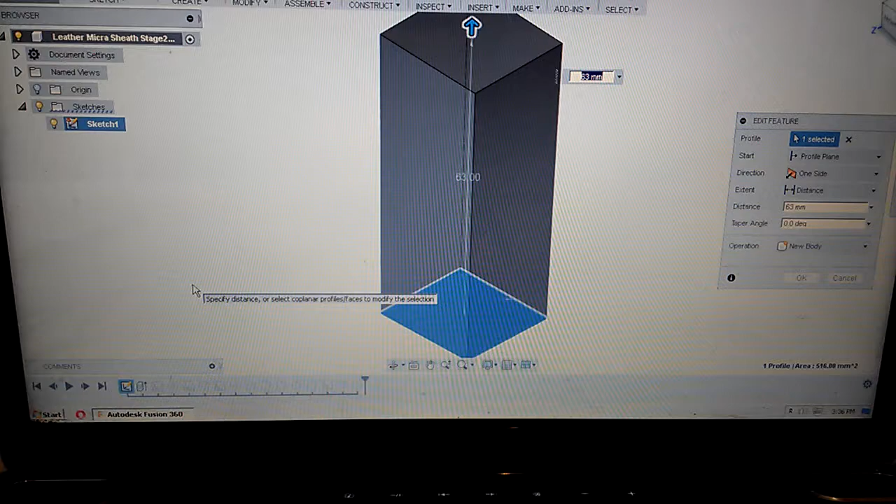This is a Leatherman Micra, and this is a Leatherman Micra case, which is not quite exactly how I wanted it. Well, it's exactly how I designed it, but has a couple things going on that I need to remedy. So I've made a short list here, so we're going to look at shortening the height.

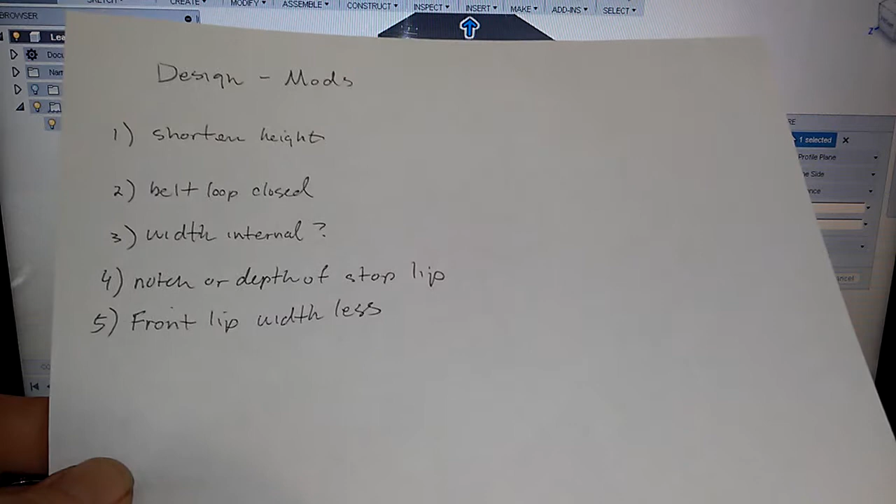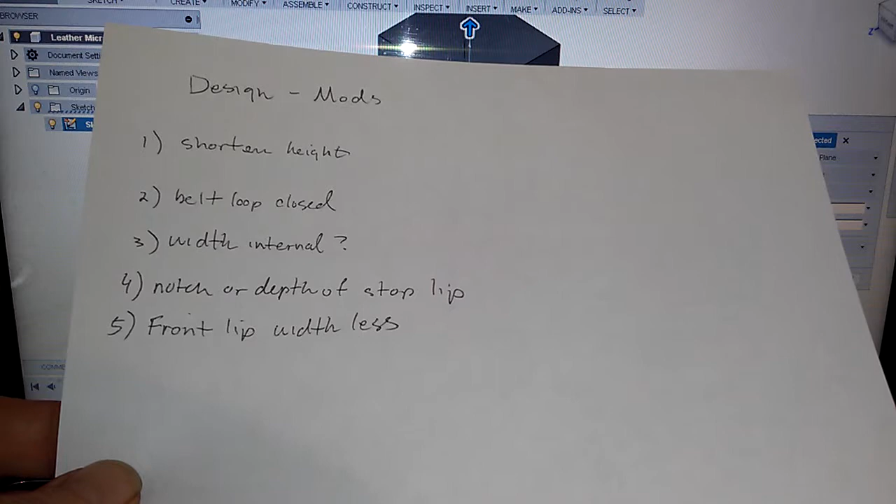I think we're going to close off the belt loop. Might modify the internal width. We're going to possibly address the notch or the front lip - that's what these parts coming out on the front here, this part and this part. I might make those a little bit thinner.

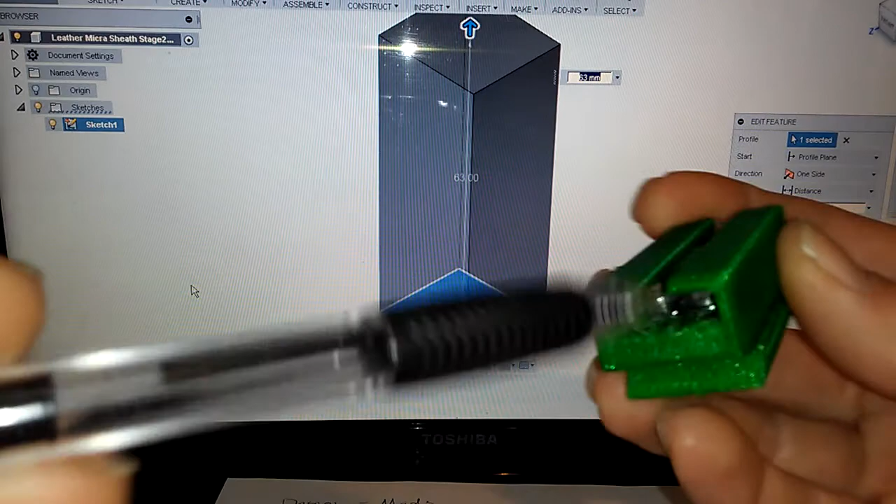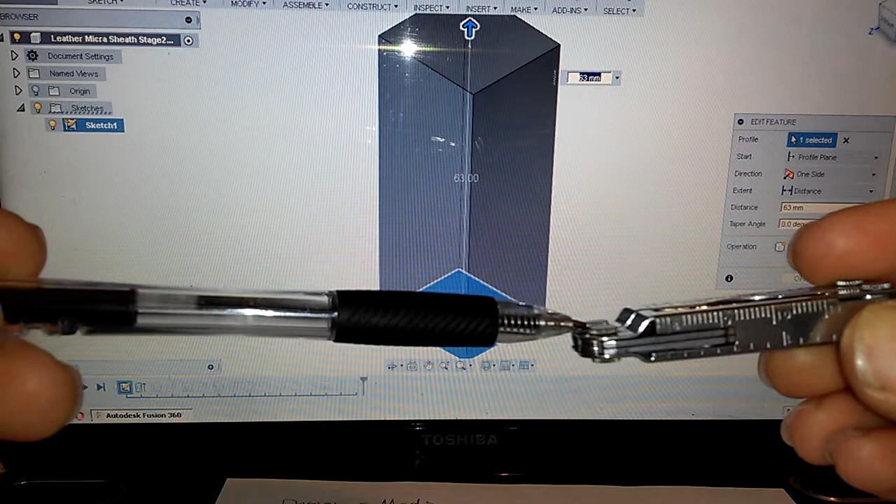Oh, the depth on the stop lip. So that's number 5, front lip width. The stop is this little piece in here that's designed to catch on this difference, and push it in. I need to subtract the thickness of this hinge.

So yeah, just a millimeter. In fact, that was about 11.5 millimeters thickness of the hinge. Yeah, about a millimeter exactly. Okay.

So anyways, we're at the height right now, so 63 less 11 and a half. We'll be looking at... 51 and a half, looks like. No, 52 and a half. No, that's right, 51 and a half. Yep, 62, 63. Okay, so 51.5.

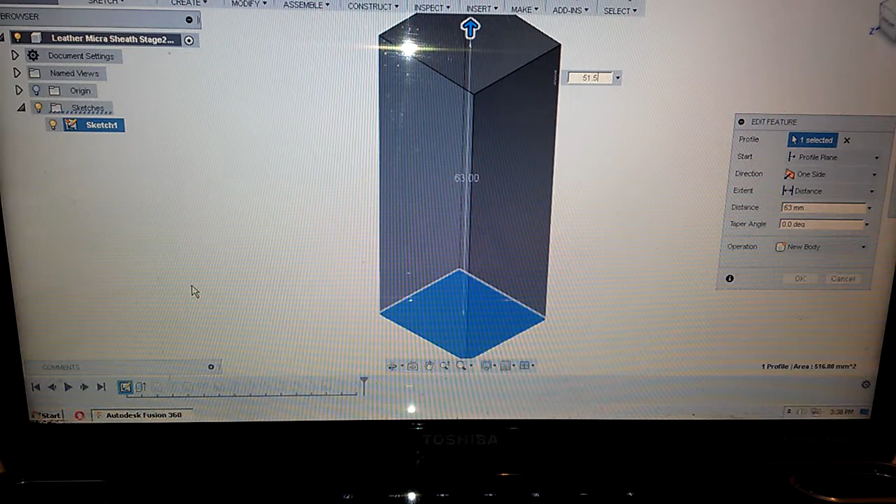So that is step number 1 complete. And in fact, before I even continue, let's go ahead and save this as version 3. All right.

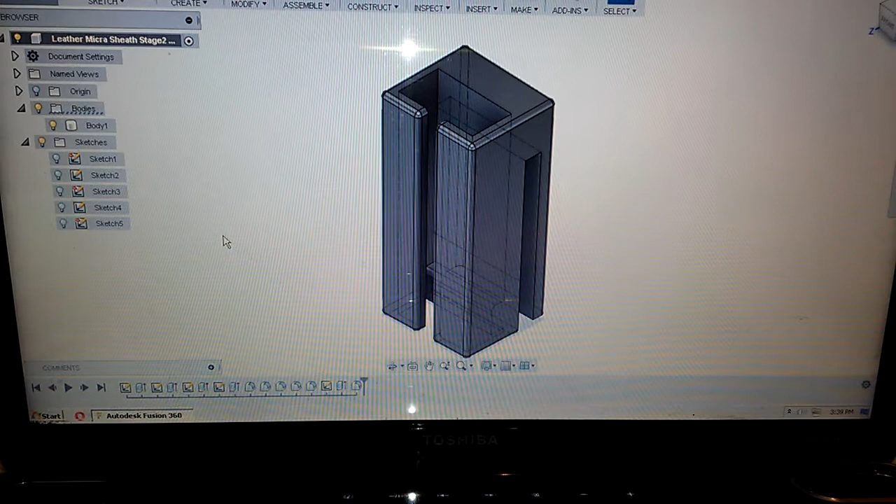So, belt loop closed. Yes. Ooh, interesting. So I cut off the bottom of this cut. Very, very interesting. Okay, so let's go ahead and try to figure out. Wow, this is not working very well.

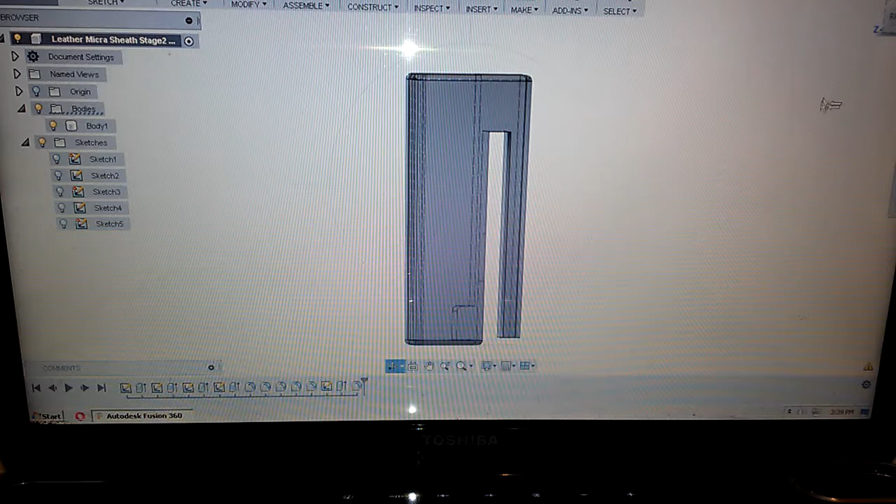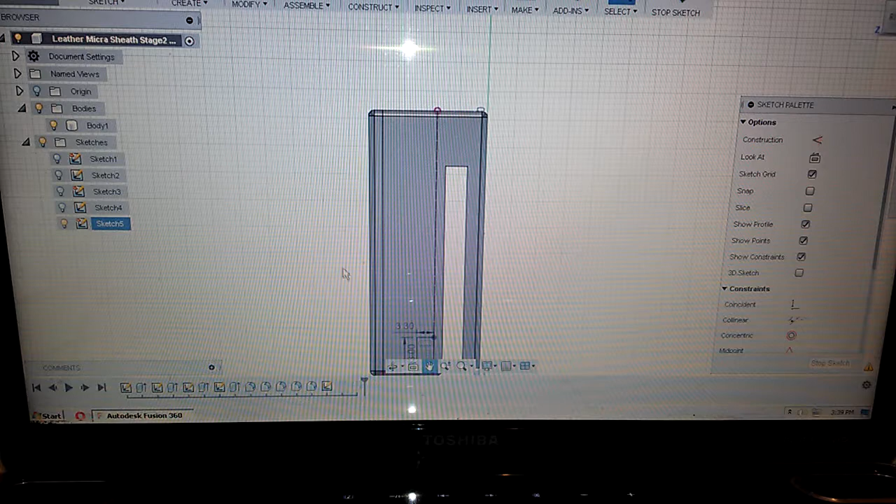There we go. I think that is the sketch we are looking for, so let's go ahead and edit that sketch. You'll have to forgive me, I am just... Oh, actually, that's not the sketch, that's the little lip stop sketch. Okay, so what? There we go. That is the sketch that I want.

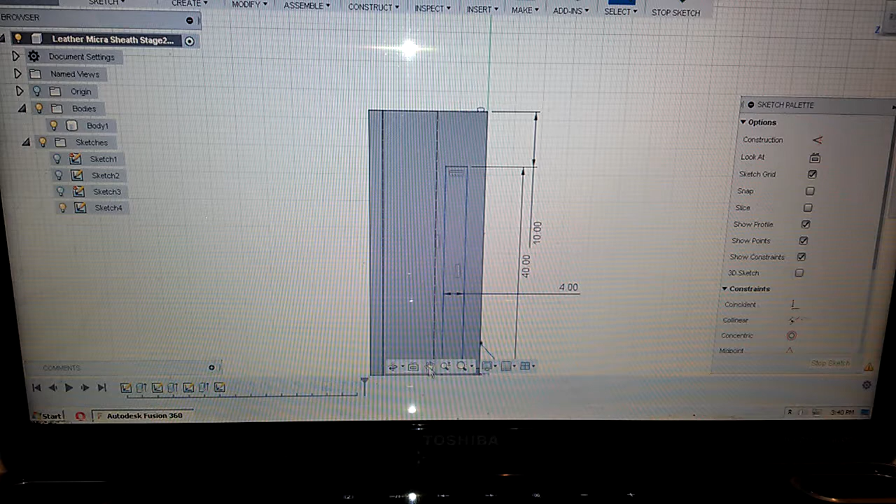Okay, so let's grab our belt. Let's do another quick measurement of the belt. Pretty much 4 centimeters, 40 millimeters. I think I could go 41 and it would still be pretty snug. If I start going too big, it's going to be loose. But I do want it to fit other people's belts potentially. That's kind of the problem with manufacturing, right?

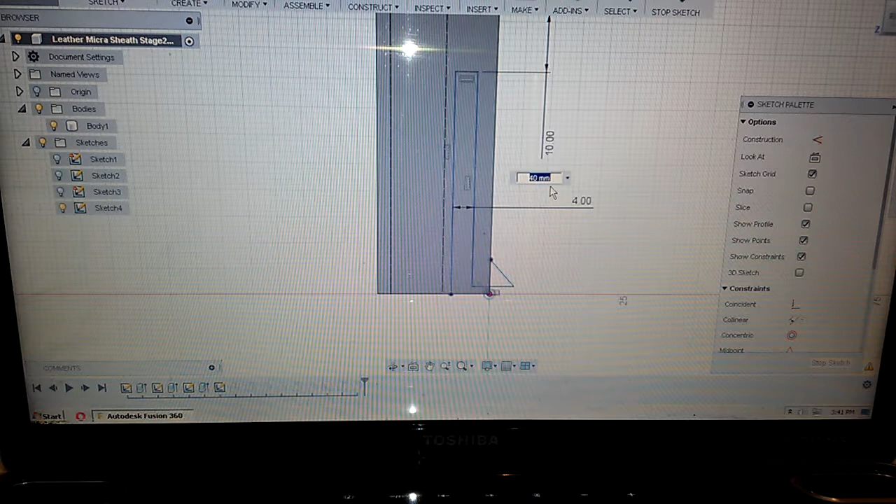The one size fits all dilemma. I think we'll go 41. So let's see, what is that? I want to redo this sketch. Why is that going to the bottom? There we go.

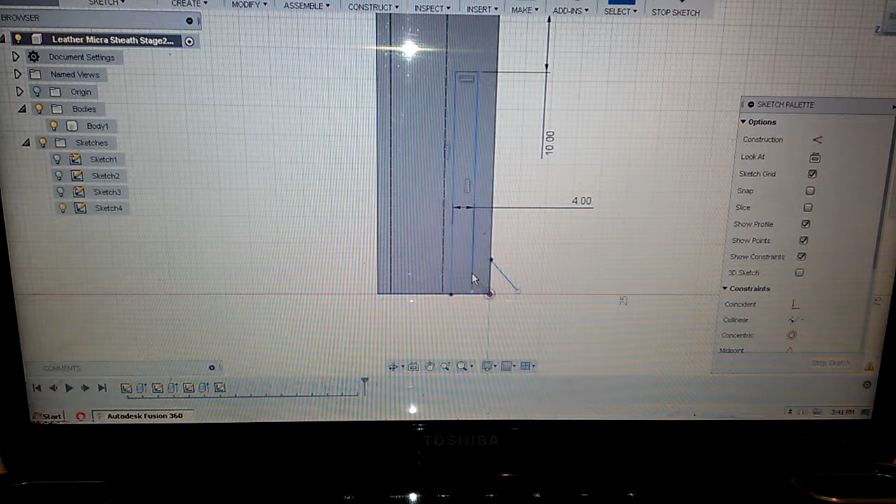Okay, so let's get a new - I don't even know what this dimension is. That dimension is not... Let's go dimension here to there. That's what I want to be 41, let's say. And okay, so let's see here. Right face.

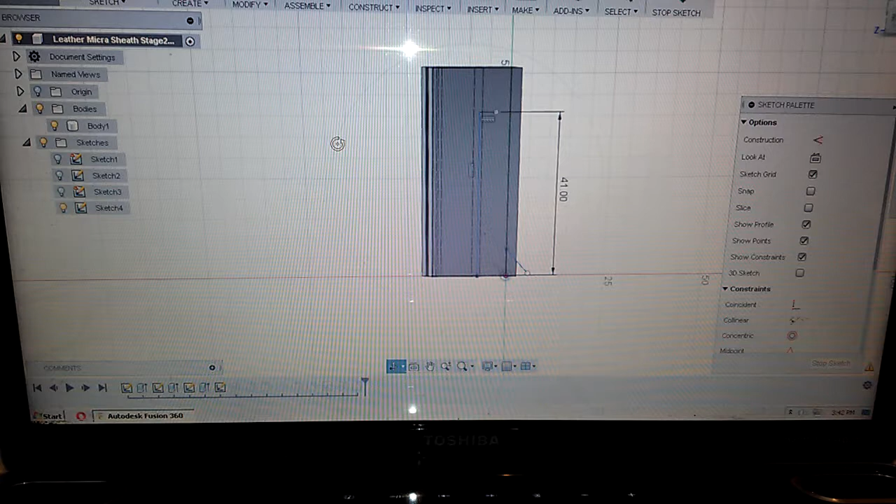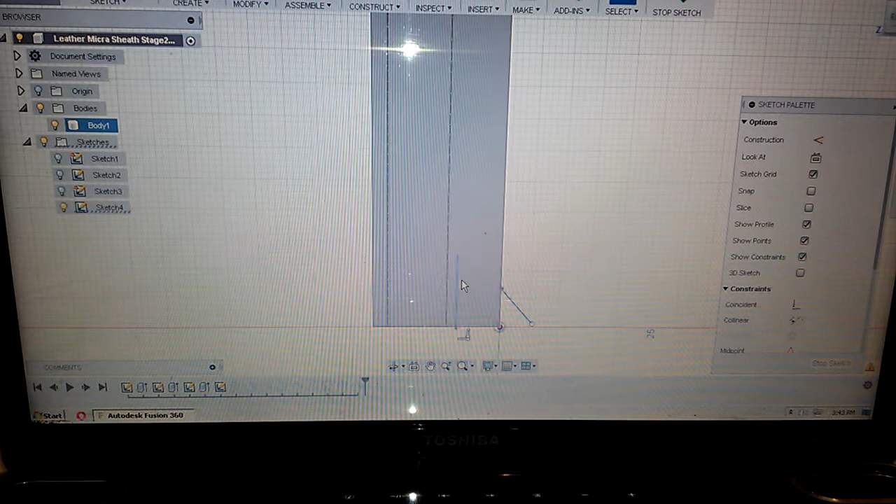Okay, that's what my problem is. I'm trying to go to the edge and I don't want to go. Oh, there we go. I'm trying to go to the edge and I don't want to go to the edge. So what I'm going to do is, yeah, I got to start this sketch from scratch, I think. It's got too many weird things going on.

So let's go to here. Just make a little rectangle. Dimension the rectangle. Call that 41, and then, oh sorry, the flash was making it just a little awful.

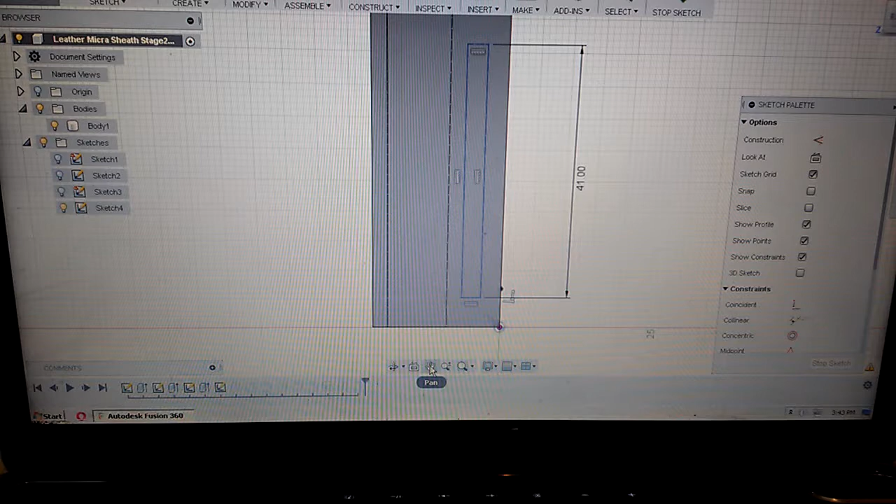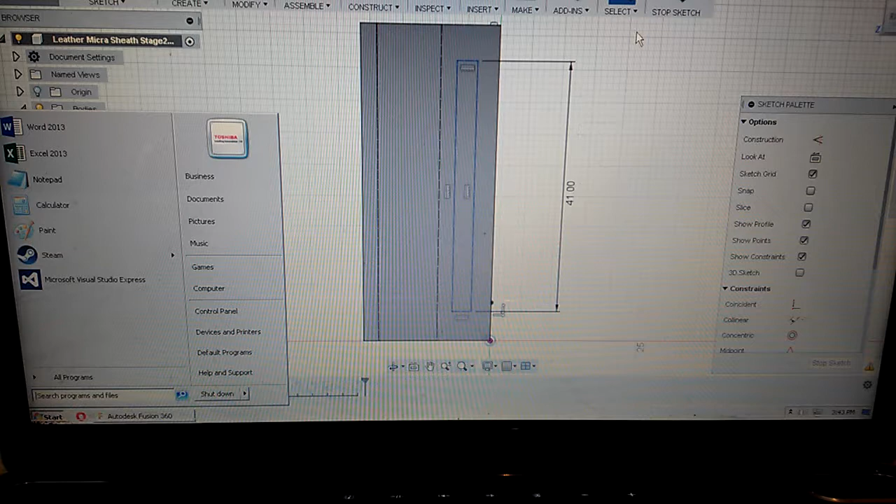Okay, what's our total? Our total height should be 51 and a half. Okay, so 51 and a half minus 41, that's 10 and a half. So let's go ahead and...

Oh, darn near perfect. Actually really close to perfect. 5 1/4 and I'm at 5.25. That's funny. So

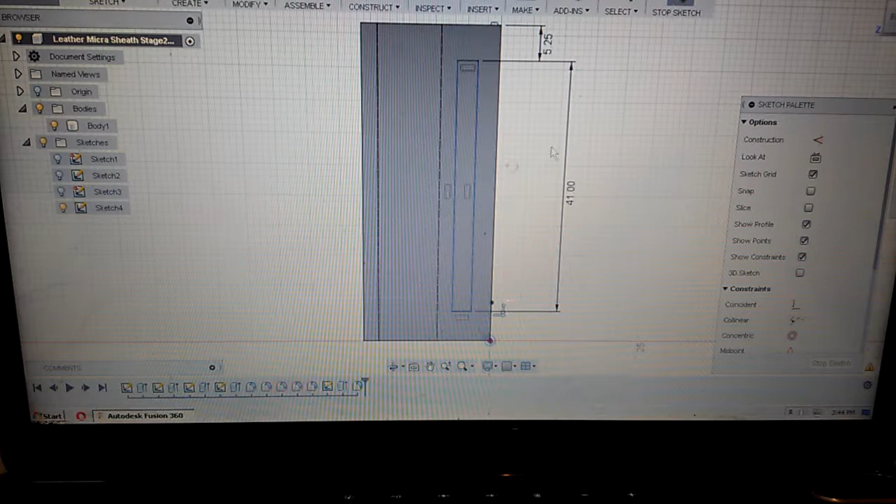this is presently our belt loop. Let's go ahead and stop the sketch. Uh-oh. Ooh, that did something really bad. What did that do? Oh no. Oh, we are having issues here.

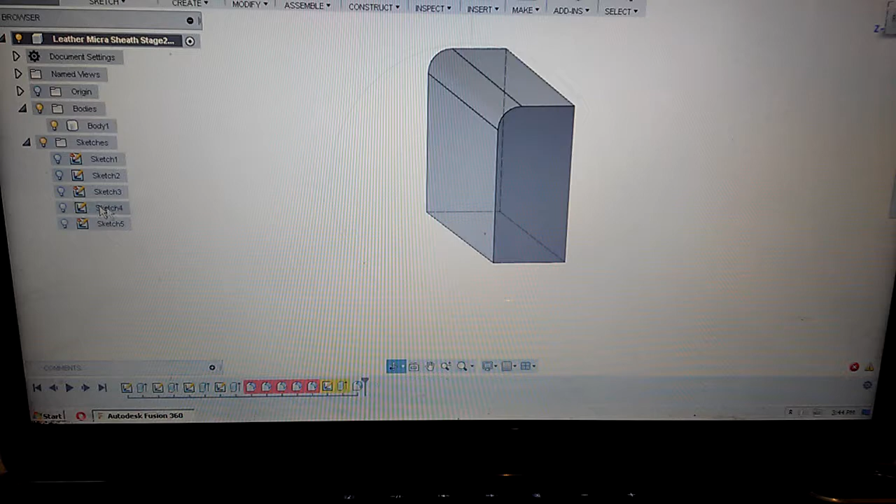Oh, we are having some significant issues. Why did that mess everything up? Can I undo? Man. What happened with this sketch here? Let's go ahead and...

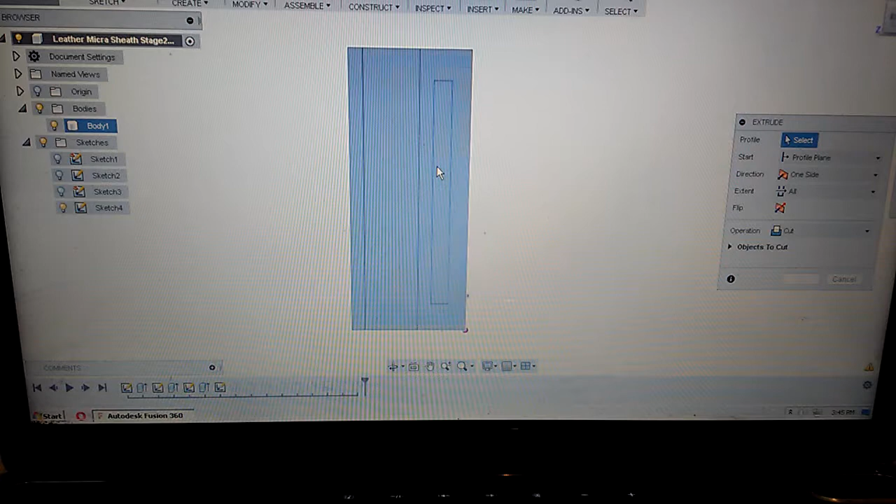This is not working right now. What's wrong with my cut? Are we cutting the wrong way? Let's go. Oh, that's not working right now. Come on.

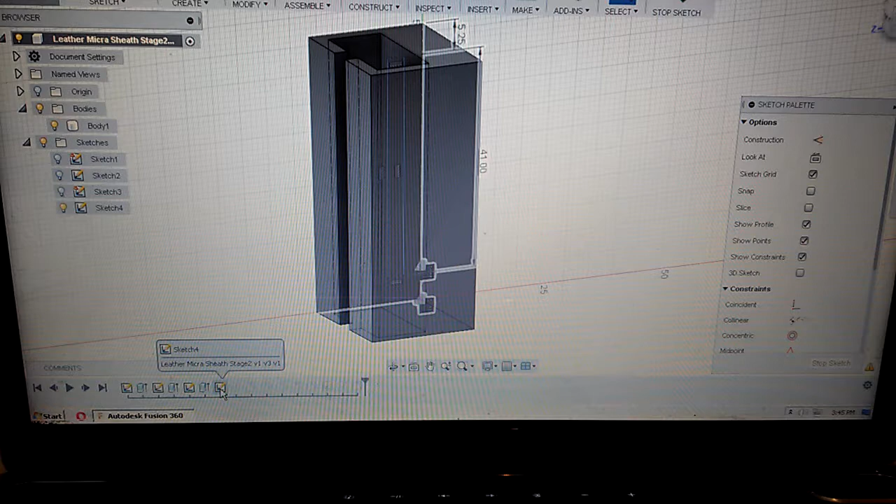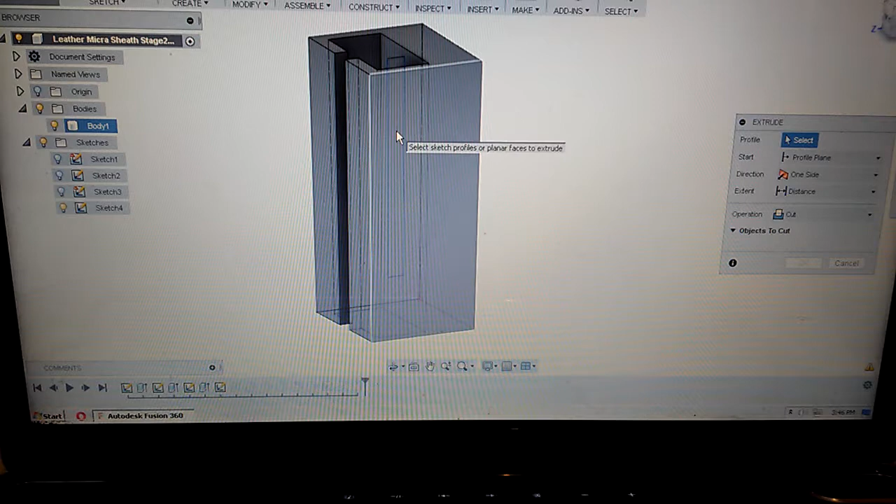Yes, this is the one that I'm trying to extrude. Extrude, cut. Start profile plane, direction one side. Yeah, I guess one side. Am I on the wrong side here? What's going on? Why is this not liking me?

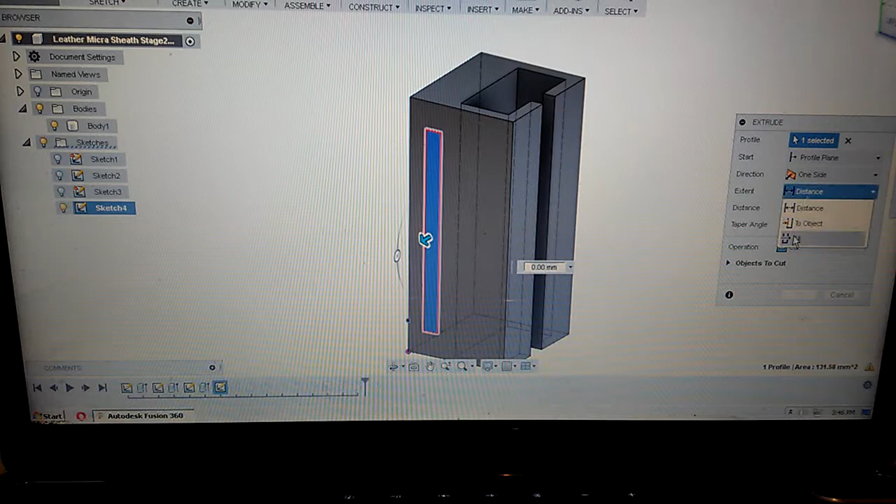Okay, there we go. Now we're getting a little better. That's what I'm looking for. Good heavens, I'm dying over here. Okay, so all those fillets failed, but that's okay. Oh gosh. But why is it not?

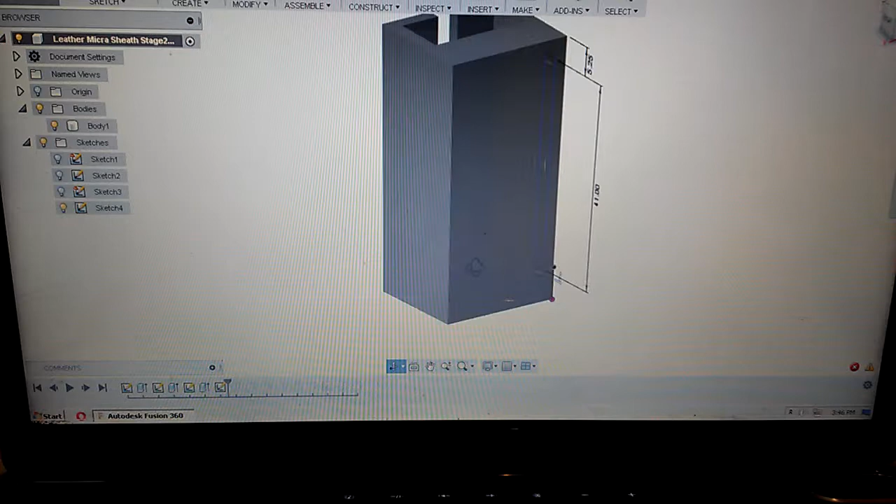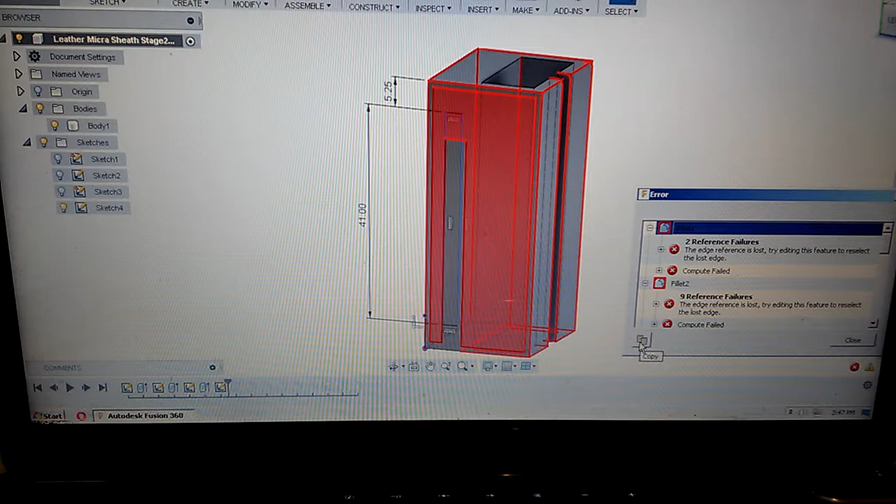Why did it like that? Oh my gosh. It's just slightly aggravating right now. Okay, that's fine, but can I delete the fillet? Yeah, just delete the fillets if they're going to be all difficult. Yeah, that's fine. Alright. Can we just... Yeah, there we go.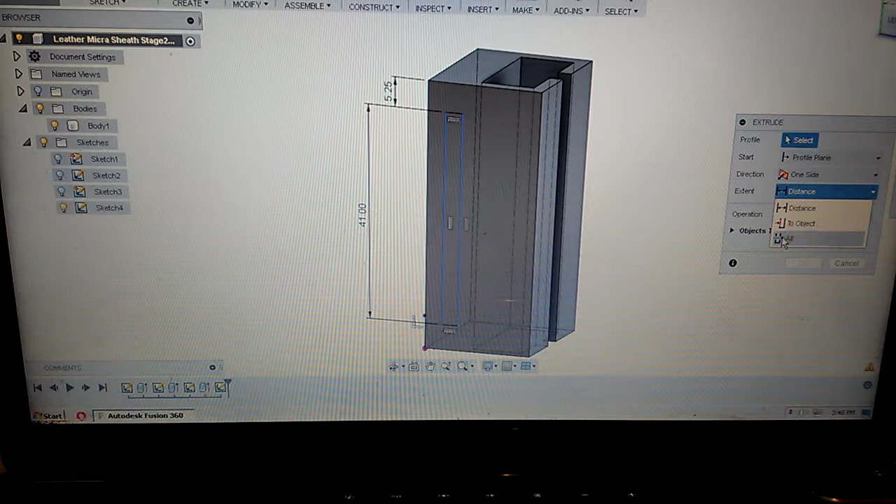Hey, there we go. Man, having a problem with that history there for a second. There was a fillet on something that it didn't like me messing around with, and it was not happy. Unfortunately, it looks like I lost my little lip on the bottom too. I think I had a feature where when it did the height, I don't know if I extruded down, but it seemed like it took the distance and height I took off from the bottom, which messed up a feature. That was getting a little funny on me.

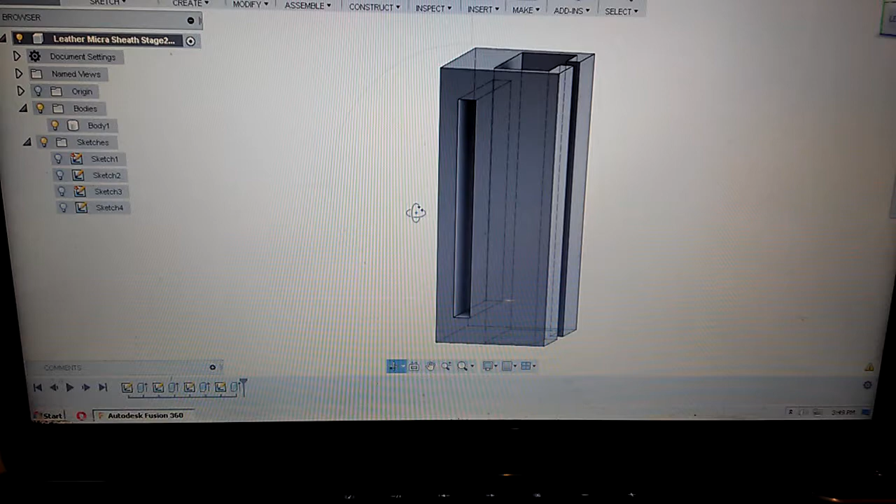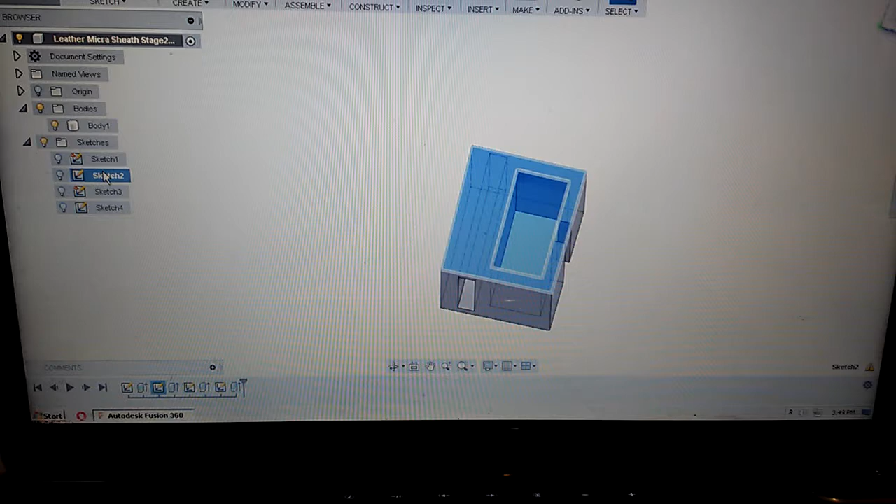So now we have the belt loop closed. The internal width - interesting. Do we want to mess with that, and or do we want to mess with these? In fact, that's probably the same sketch. No, it's that sketch, numero dos.

Oh wow, and then I cut it. Interesting, okay, so we're at 19.05, and that was actually, I believe, the official width of this thing. Let me take another...

Gosh, you know, on this I wish I had a pair of calipers. Shame on me for not having them. I mean, I can't even tell. It looks like it's 19 on the money, so I guess I could add - how much could I add to this? .05 millimeters?

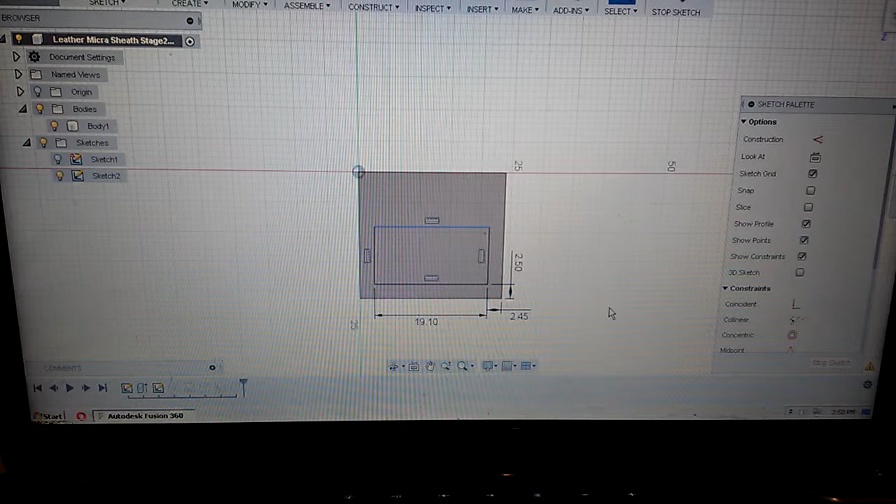Yeah, let's add 0.05, so I'll make it 19.1 millimeters. Perfect. And 0.05, I guess I'll make that 2.45. Alright, that's fine, that's fine. Okay, stop sketch. Yeah, cool.

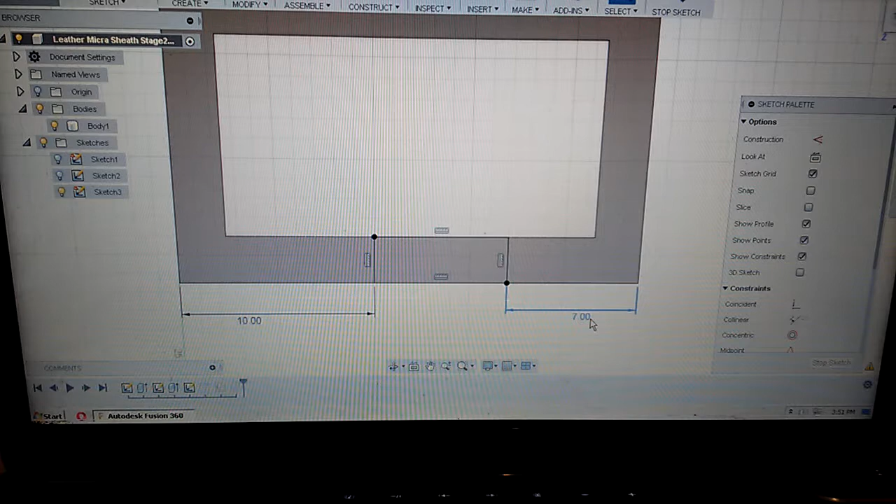Alright, now sketch number 3, which I believe was this one. Yeah, okay, so this is our little cut. What I think I'm going to do on this is, let's go ahead - what's 5 look like? Whew, that's not a lot. About 6 - oh, better. About 7. Yeah, 7's a lot. How about 6.5?

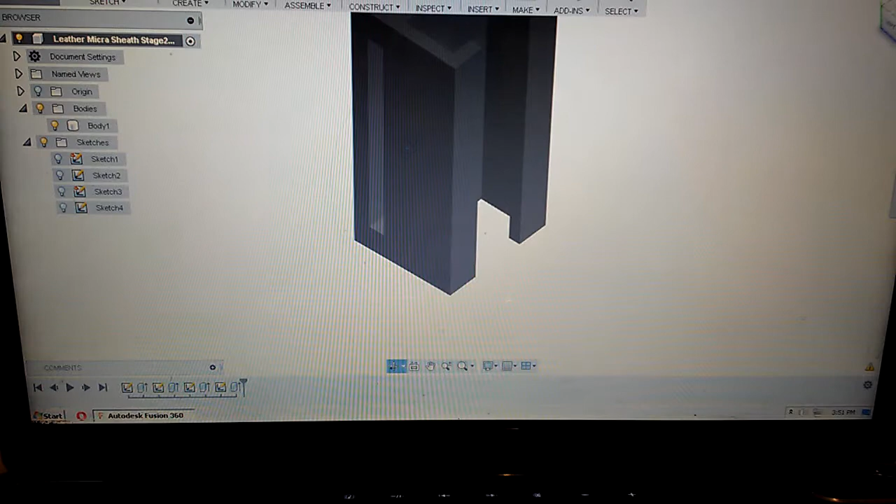Gotta admit, Fusion's not too bad. It's taken me just a couple sessions to kind of get a little more comfortable in it. It doesn't feel as technical as SolidWorks - it has a little bit of a softer feel towards it. I don't know if that's just in the UI. But anyways, I need to learn some more shortcuts. I'm kind of struggling with the shortcuts, to be honest.

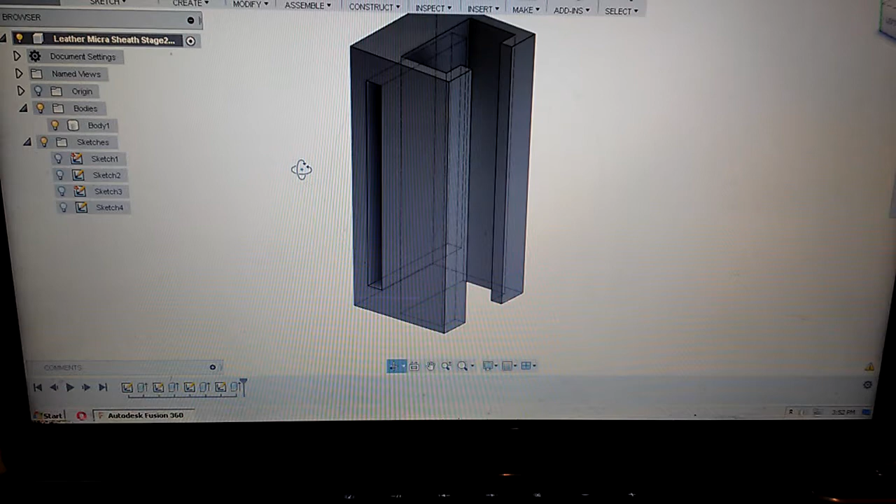Alright, so we got the shortened height, belt loop closed, the internal width, the front width changed. Let's get our little notch friend back. In fact, we're not worried about the top hinge, but the bottom one, alright, let's see here. Man, it's a really hard measurement to grab. About 2 millimeters exactly, looks like we're coming up from the distance from this plane to the plane of that hinge.

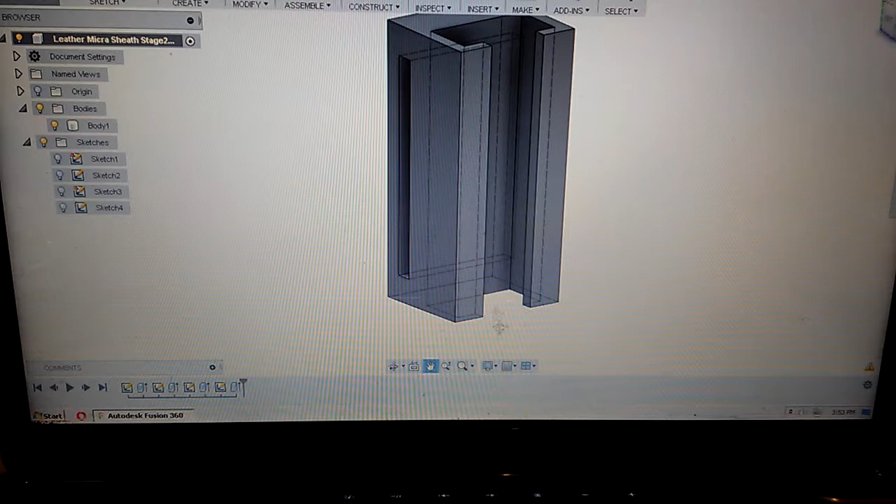So what we're going to do is, let's see here - where are we going to bring this in? All the way at the bottom, I suppose. So let's go select that face. Let's go ahead and sketch a rectangle. Sure, something like that. Okay, let's go ahead and dimension this bad boy.

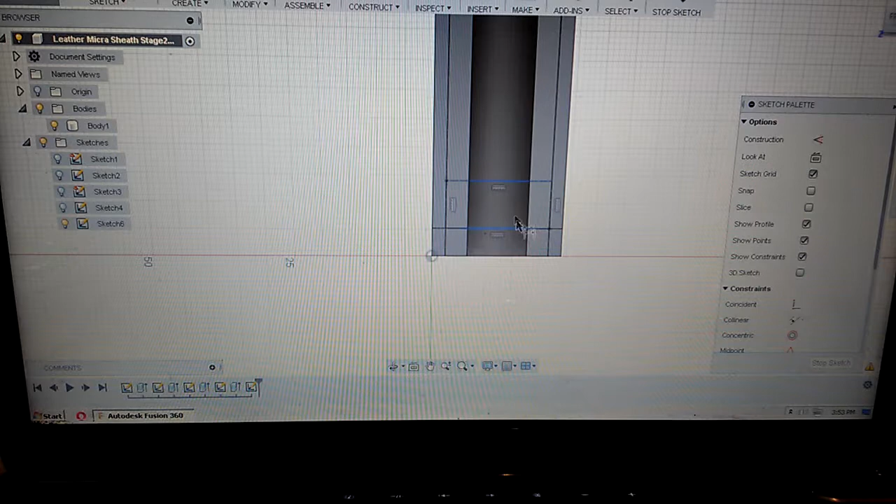Oh, I love dimensioning, greatest invention in the world. Greatest invention in the world.

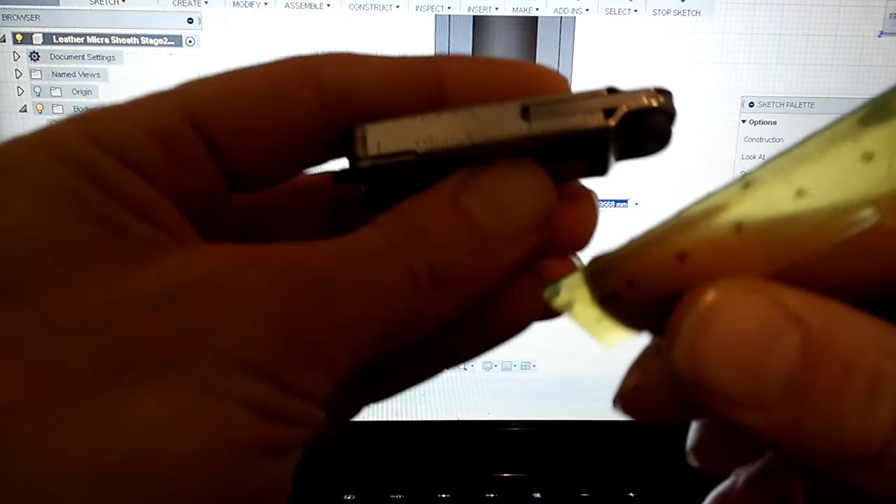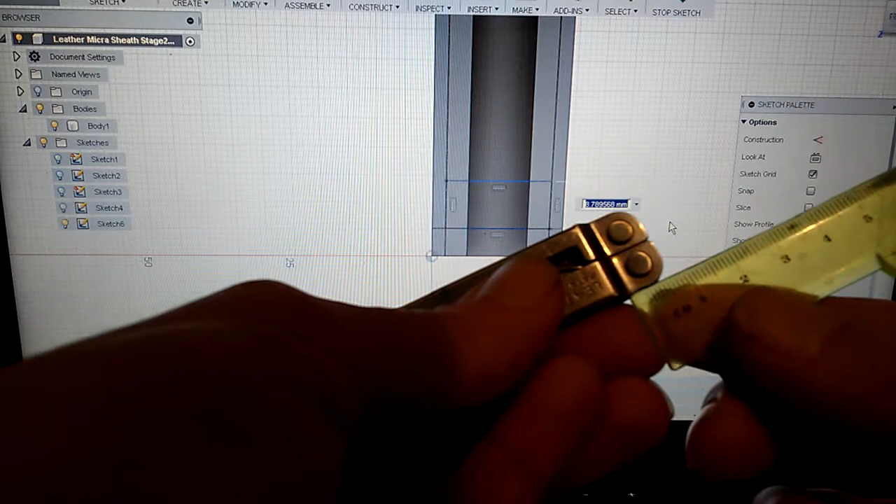Alright, so let's look at about 10. There's a little curve here, and although I could try to do something fancy with the angle, I'm not going to - I don't think it's that critical. 10 looks like almost too much, but in fact it can stop just a little over the center of the hinge. So let's call that... seven. Let's call that 7. That's 7, looking pretty good.

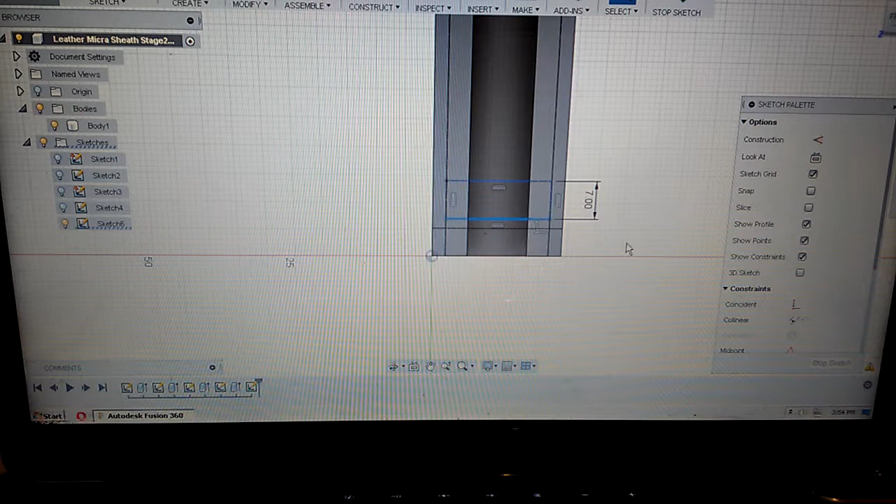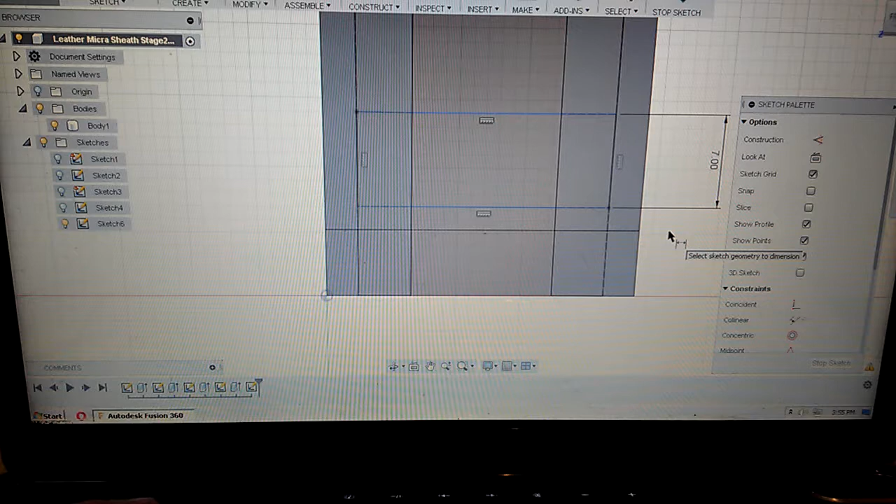Oops. Now, of course, since this thing wanted to... oh, darn it. Okay, so, come on. Oh man, it is not getting the dimension that I want right now. I want that hidden line, I thought. Oh, wait a second - actually what I want is this guy to that guy. Oh, maybe I'm not in dimension mode, that's what my problem is. Nope, that's not right, I want a dimension. No. I'm doing this sketch wrong. I think that's the problem, is that I drew this rectangle wrong in the first place. What I wanted to do was draw it like that.

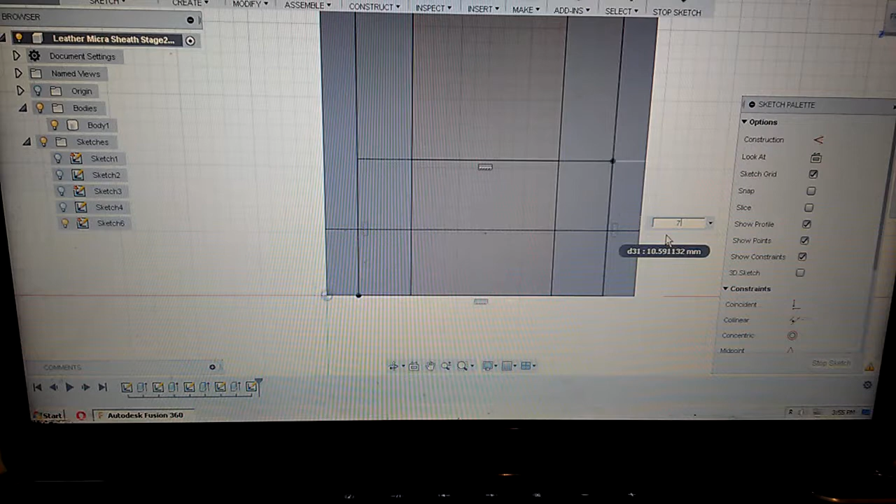There we go. Height is good. Okay, so we're going to take this sketch and extrude it.

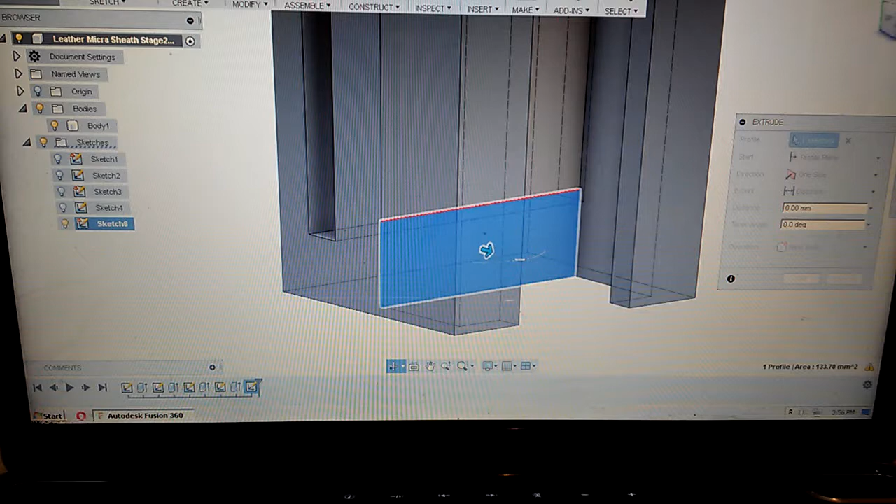How far are we going to extrude? I think we already decided: 2 millimeters. That's going to give us our little stop lip. It means you have to put the Micra in a certain direction. It'll still hold either way, it just won't go down as far the wrong way.

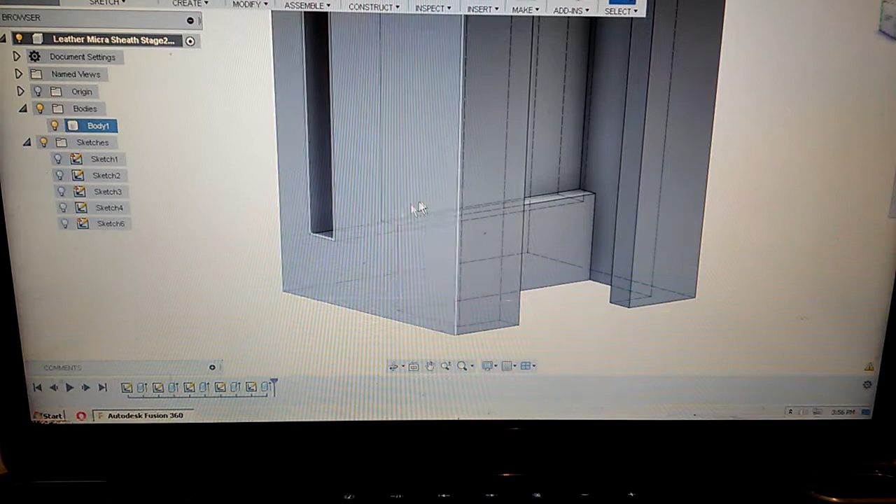So anyways, that is the last item, I believe, on the design list.

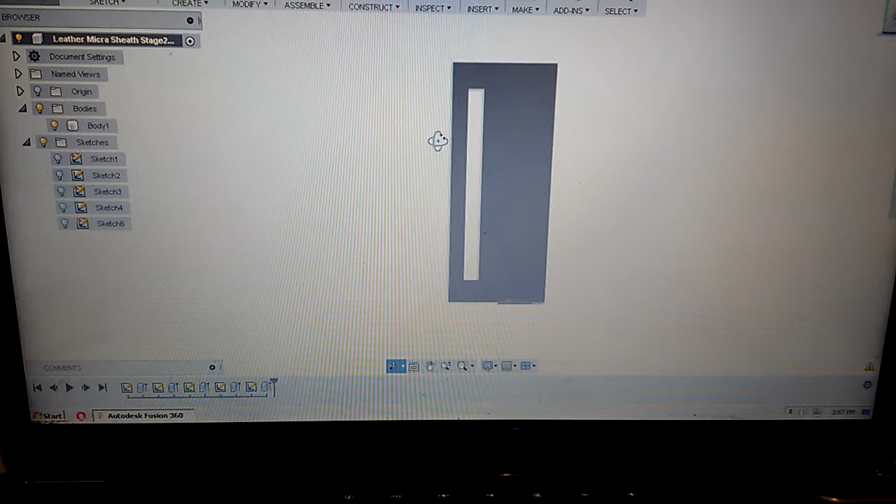So here is the basic version 3.0 Leatherman Micra tool. We have the channel where the tool goes, and we have a fully enclosed belt loop so you don't have to worry about it coming off at all. It's also a lot stronger, so you don't have to worry about the hole.

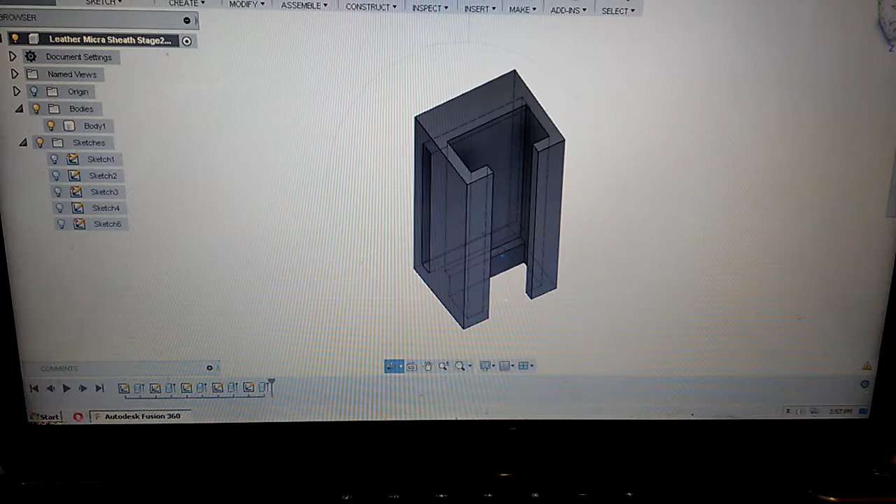The hinge here is relatively strong, but on the off chance you catch it on something, it's somewhat possible, though unlikely, that you could snap this. This design is much, much stronger. So we've got that going on, plus our width change, and our little lip on the bottom so that when you put the tool all the way in, it stops.

So I'm going to go ahead and save this again as version 3. Oh wow, it keeps adding these — stage 2, version 3, no fillets. I keep wanting to say fillet, no fillets. So fillets were messing me up.

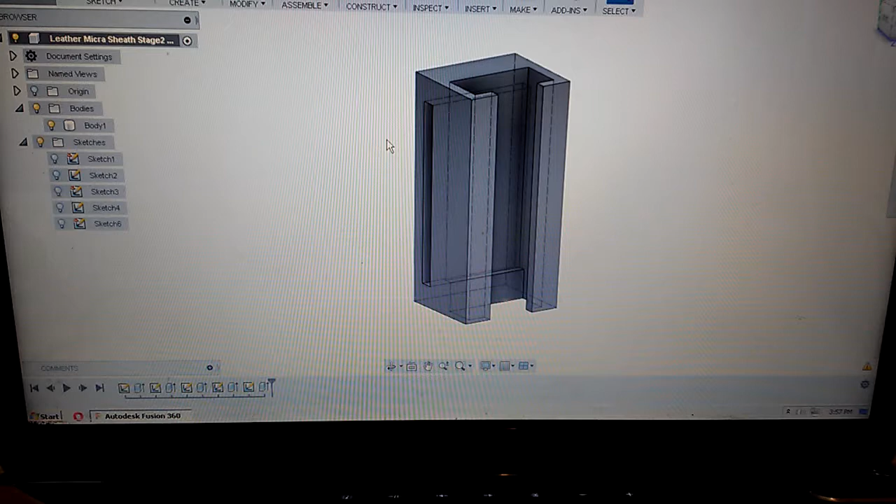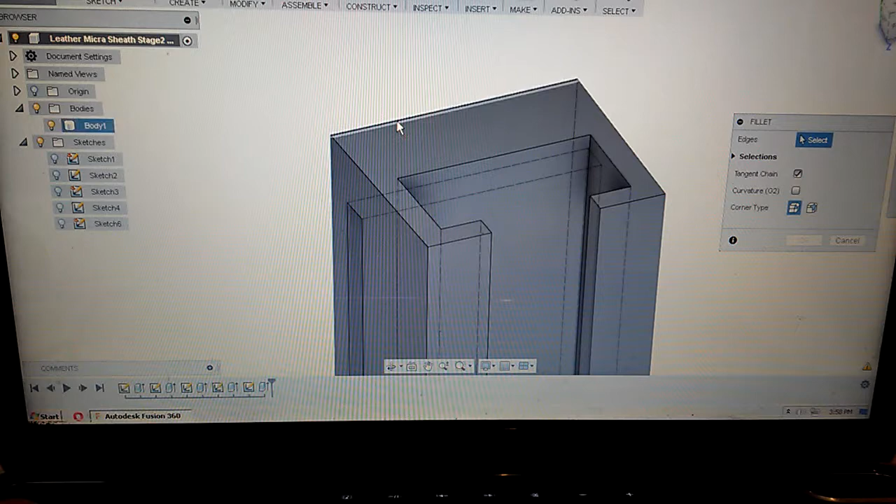So let's actually go in here now and round this up just a little bit. Modify, fillet — you, and you, and you are all gonna get... what's a millimeter look like? Not too bad.

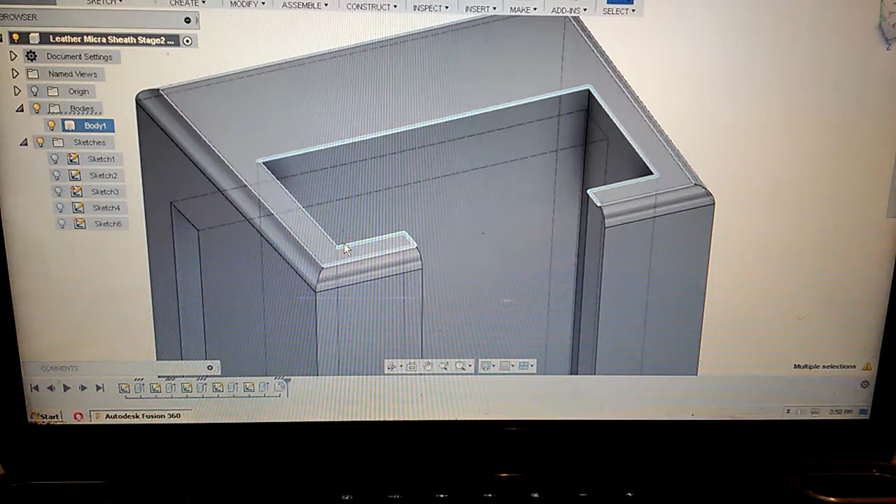Hold down control, of course, to select multiple surfaces. We'll go ahead and hit F for fillet. Give them 1 millimeter. It's looking a little more sophisticated, so to speak.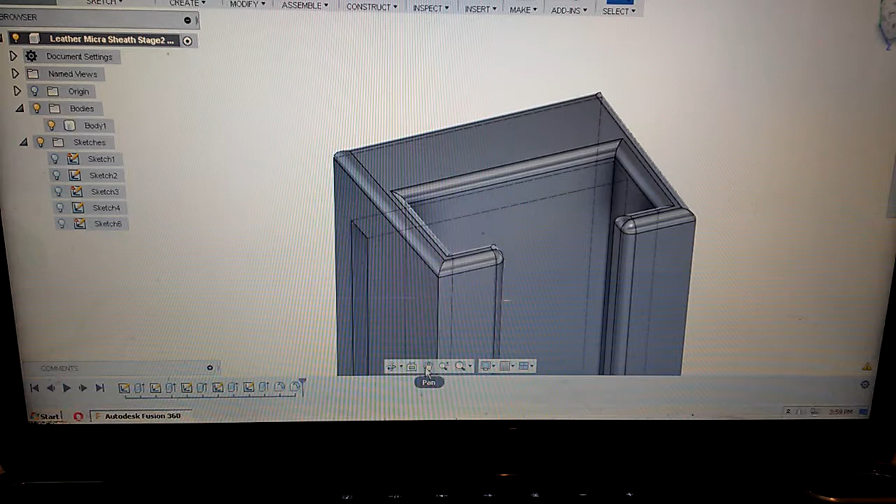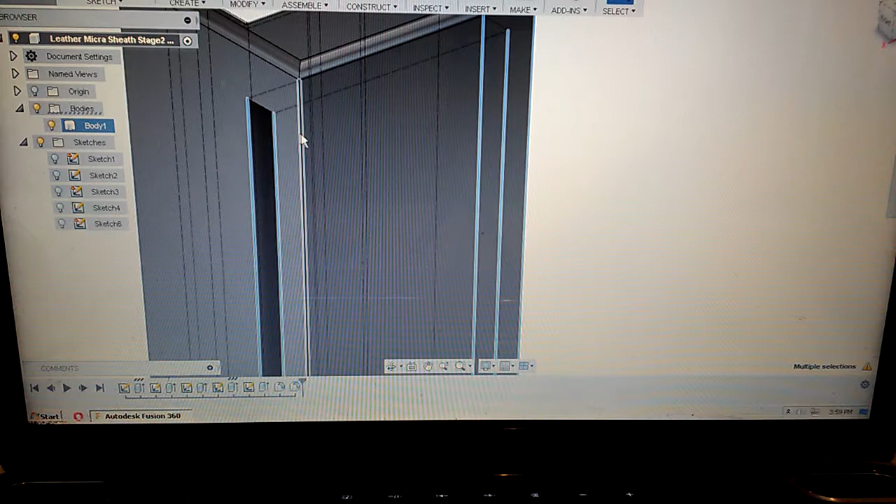Let's go ahead and fillet everything. So, select — let's get this edge, that edge, that edge. Let's go around and get that edge, and that edge. Fillet all those at 1.

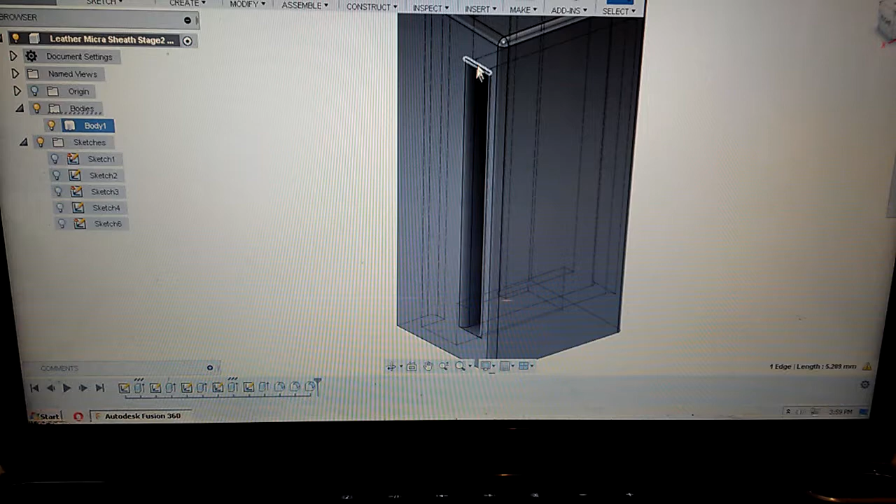And I guess while we're at it, we can go ahead and get this one, that one. Why isn't there... I wish it would tell you what the shortcut is when you hover over the tool, just my opinion. I need to look at the shortcuts on this program.

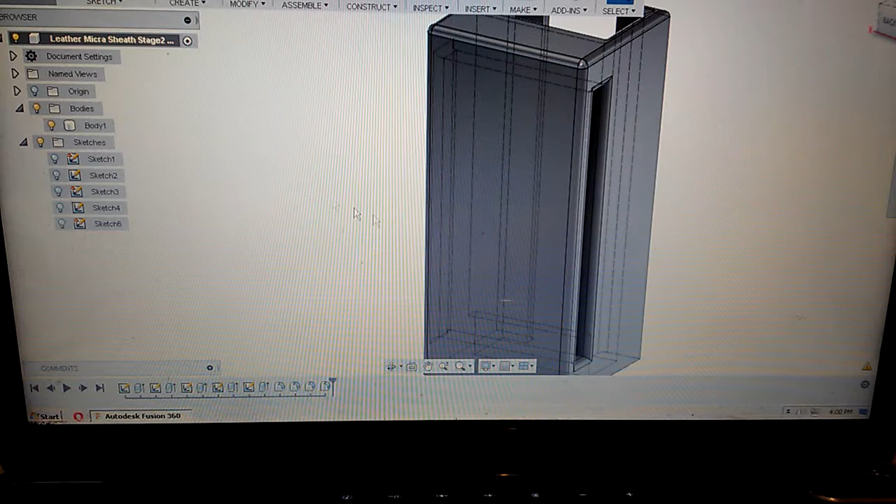Big believer in shortcuts. Alright, so what do we got going on down here? Ooh, all these nasty sharp edges, terrible sharp edges. So let's get this guy, that guy, that guy, that guy, that guy, that guy.

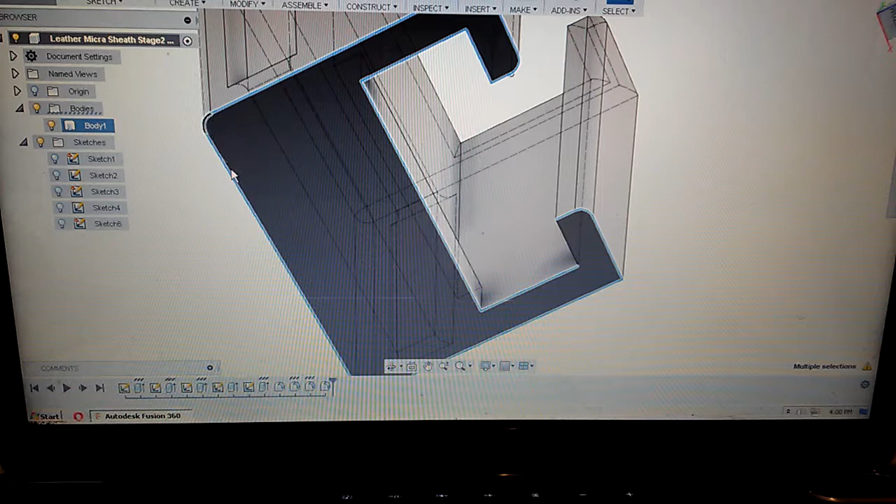Oh, let me fillet a corner — that's going to be crazy. I probably should try to do that by itself, but let's try that corner and one more if I can just keep the selection going and not mess it up.

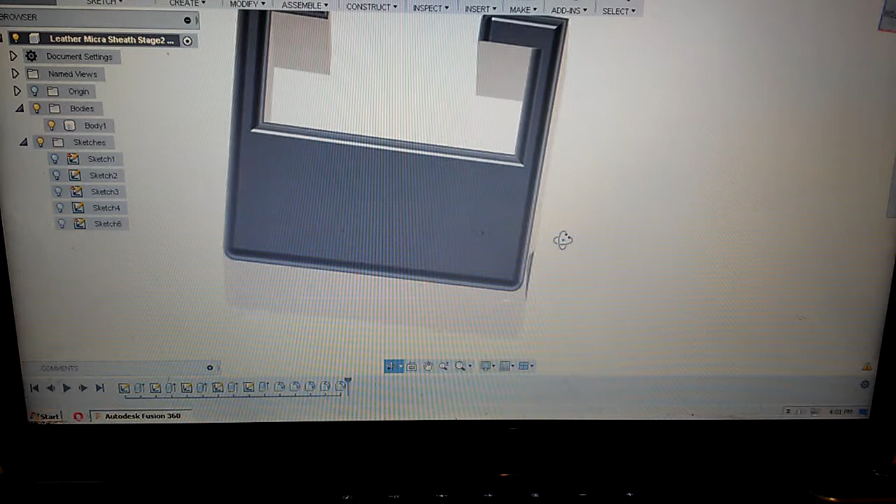Alright, go ahead and put a 1 on all those, and that seemed to... oh, we missed just a couple. Did we? Let's see here, I think we did. Yeah, we missed this guy. It's alright.

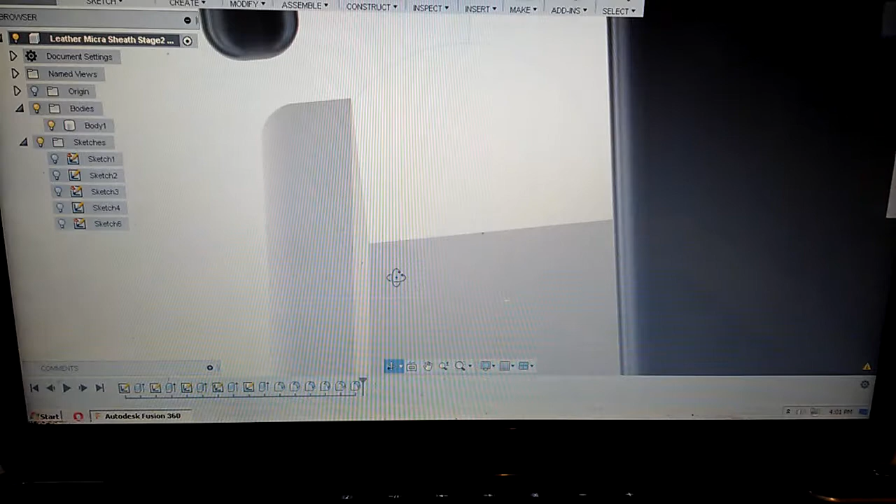Fortunately, the model doesn't care too much if you fillet them all at once or not. Oh, we missed — I missed that edge too, that's like the inside edge. Missed that edge right there.

Okay, so in fact, let's go ahead and get 2 more edges here. Now I got the model all... get that edge, that edge.

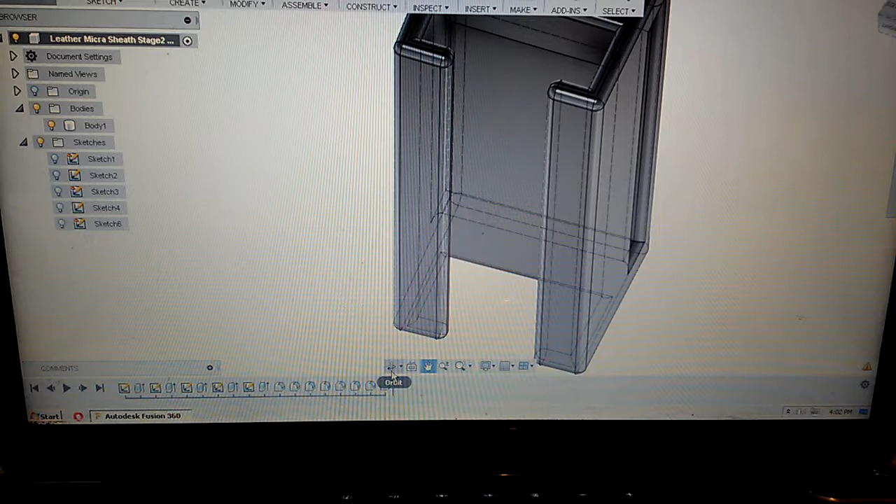It'd be interesting to see what happens if I just highlight the whole thing and say fillet. Maybe that's possible, maybe it works well in this program. Hard to say, let's see here. Pretty rounded over here, rounded over there, rounded over there. I think we're about ready to go — version 3.0 here.

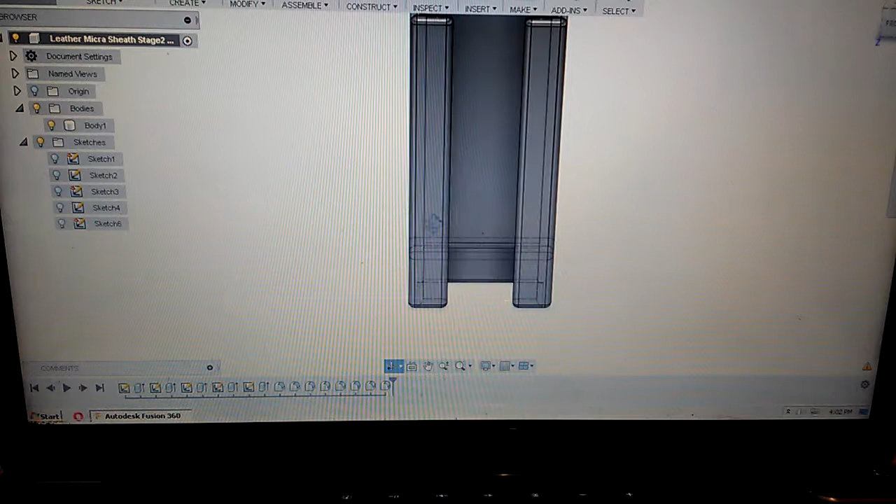Oh man, you almost can't see with the shading my little lip, which I have not as of yet filleted. In fact, I'm going to give this guy 0.5 — that's super small, but that should help just a little bit.

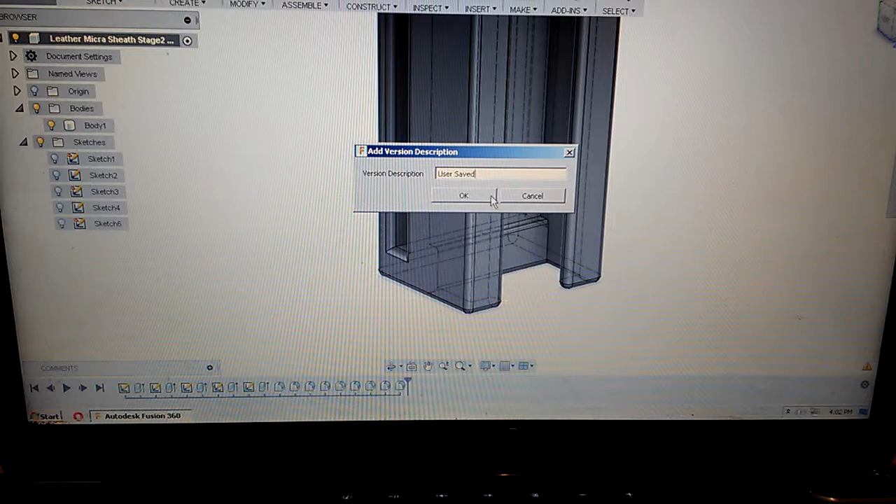All right, so let's go ahead and save this. Yeah, description, I guess. Save, and now we're gonna go make... Cura, yeah.

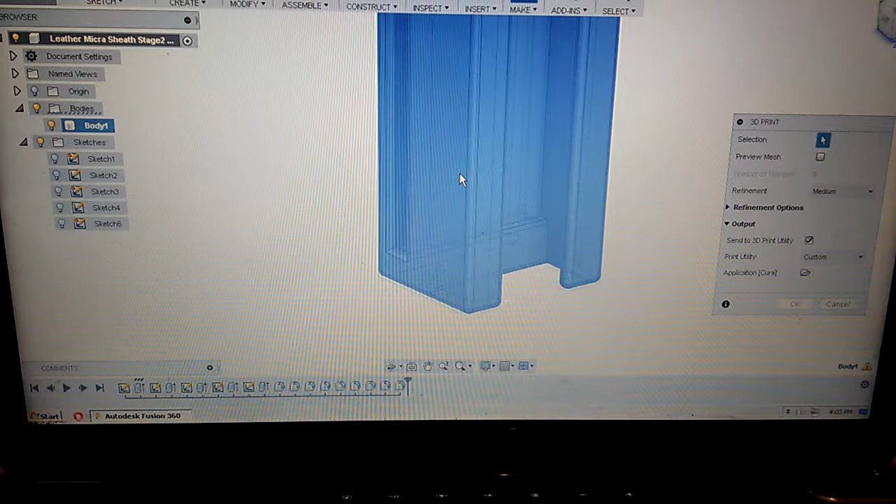Refinement medium, refinement options — sure, why not? I don't know if it's doing something right now. Oh, that's right, you got to select the model. Sometimes these programs drive me crazy with all this silly stuff — like, what model do you think I want to select?